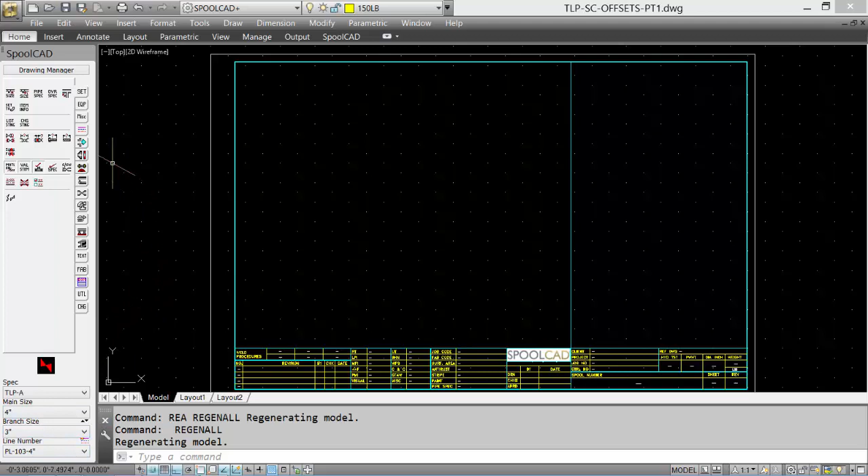First, we'll take a look at our active settings to see that we have the correct isoplane, spec, main size, branch size, and line number. Next, we'll select the auto route feature and enable auto route, which will automate our component placement.

Next, we'll go to our fittings tab and start with a piece of pipe, and we'll just graphically, for this sample, run a piece of pipe. You can zoom up on it. Let's add the elbow, a 90-degree elbow.

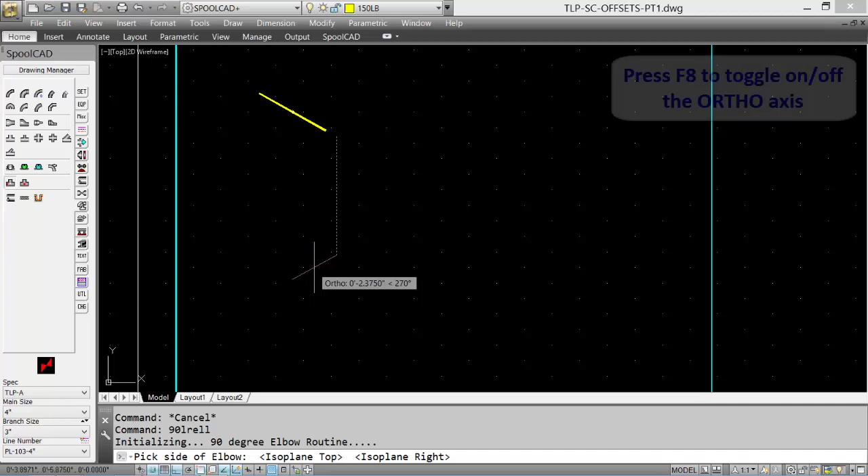By default it's going to point straight down, but we'd like to rotate this 45 degrees. So we can take it off our isoplane by hitting the F8 key, which is the ortho. It now allows us to free pick.

We can then graphically select a 45 degree, or what would appear to be a 45 degree angle. That looks pretty close, and we'll pick a point. The 90-degree elbow is now bent at the 45 degree.

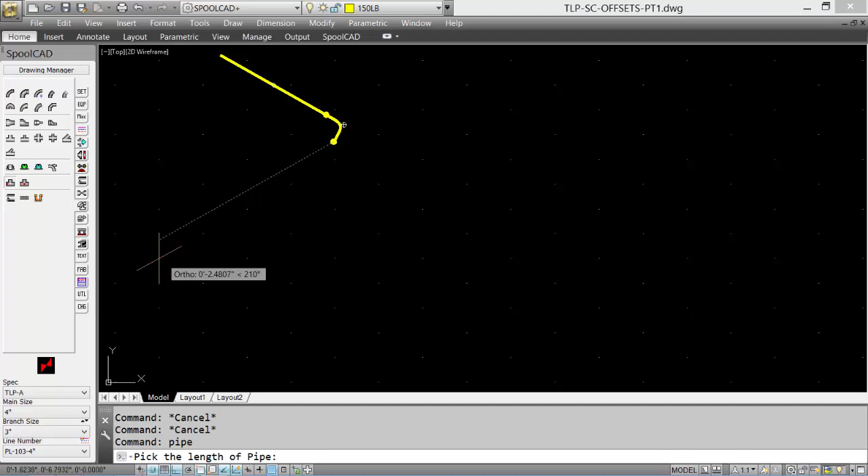We can then add in a length of pipe. This is just a vector, and we'll add the pipe to the end of the elbow. Select a reasonable distance, pick a point, and the pipe follows the angle of the 90-degree elbow.

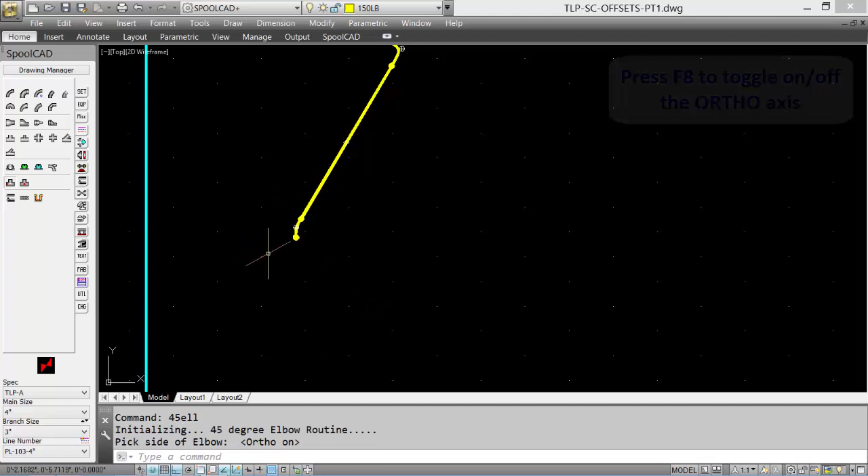We can then finish off with a 45-degree elbow to bring this back to a vertical. To force it to a vertical, again we'll turn on our F8. Select F8 to turn on the ortho, pick down, and it puts in a 45-degree elbow facing down. We'll finish off with just a length of pipe.

And there's our simple offset. The 90-degree elbow, turned 45 degrees, bending down to a 45-degree elbow.

The next topic in Module 7 is drawing rolling offsets. For this sample, we'll use two 45-degree elbows and create a rolling offset. We'll zoom up on this area of the drawing.

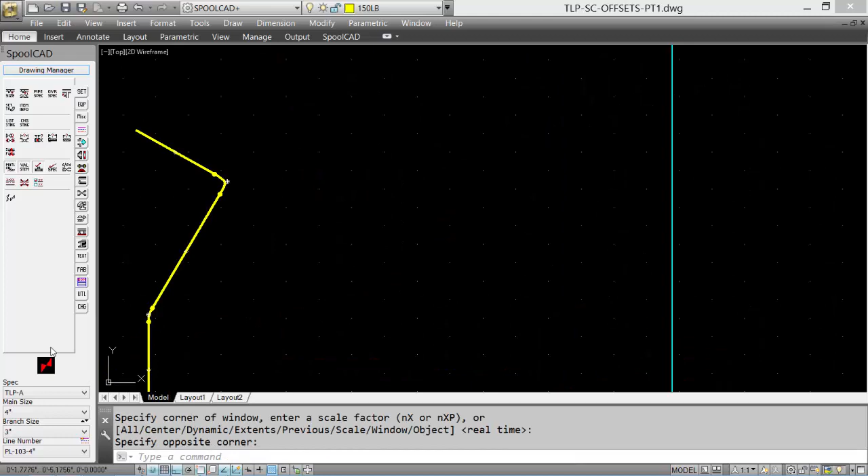First, we'll check our active settings to make sure they are set properly. Next, we'll enable the auto route feature, and then again select our fittings tab. Select a piece of pipe, place it, and then select the 45-degree elbow.

Normally the 45-degree elbow would just come down at 45 degrees in the same plane. We're going to give it the illusion of offsetting by moving it a little bit ahead.

Place another length of pipe. Again, this is just a distance vector. It will follow the 45-degree elbow.

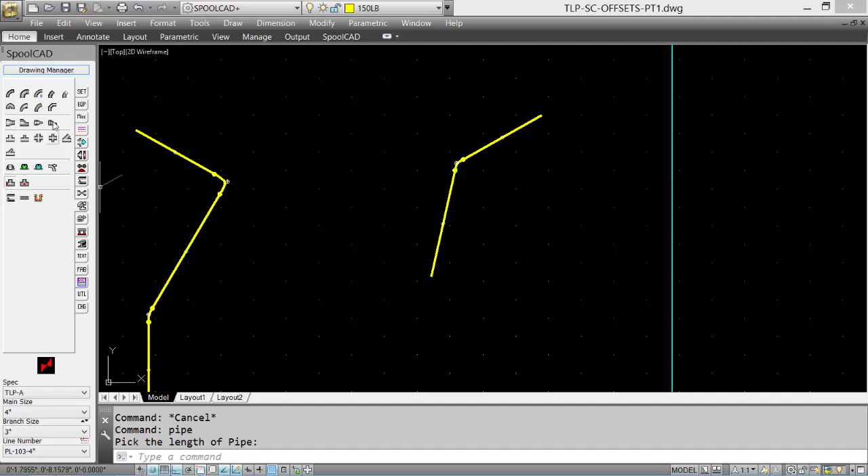Follows it down, and then we can place another 45-degree elbow to bring it back to an isometric plane, and then finish off with a length of pipe. So there's a rolling offset, giving us the illusion that it's bending over and rolling at the same time.

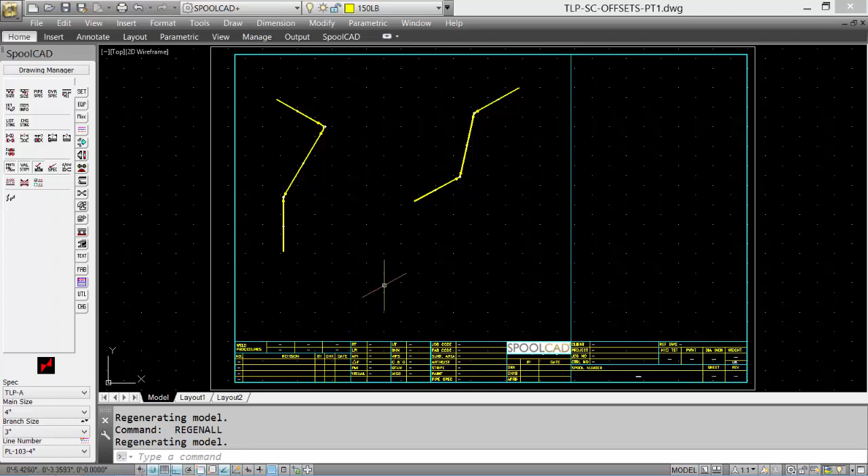Our next topic is placing piping bends. We'll place a sample bend just down in this location of the drawing. We'll zoom up on it, and place the bend in here.

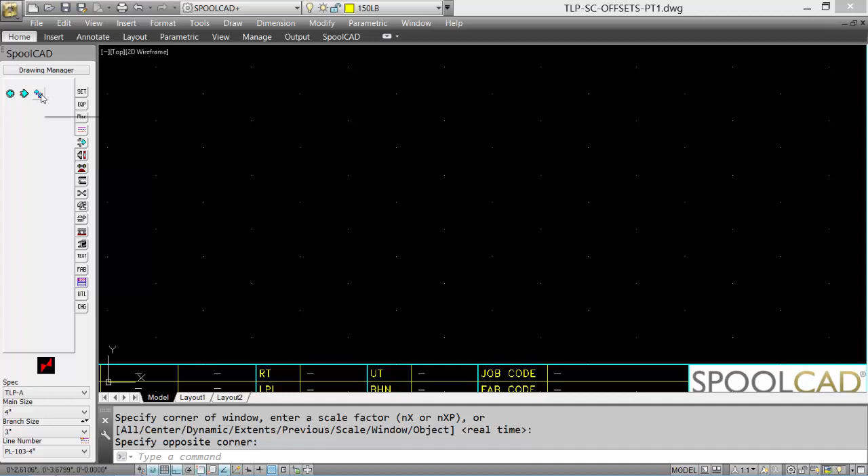Adjust our active settings, enable our auto route feature, and then select our fittings tab. We'll start with a piece of pipe. We'll then pick our pipe bend tool.

The pipe bend dialog appears, allowing us to set the pipe diameter for the bend. We'll use our 4-inch main size. Angle for the pipe bend, set to say 60 degrees.

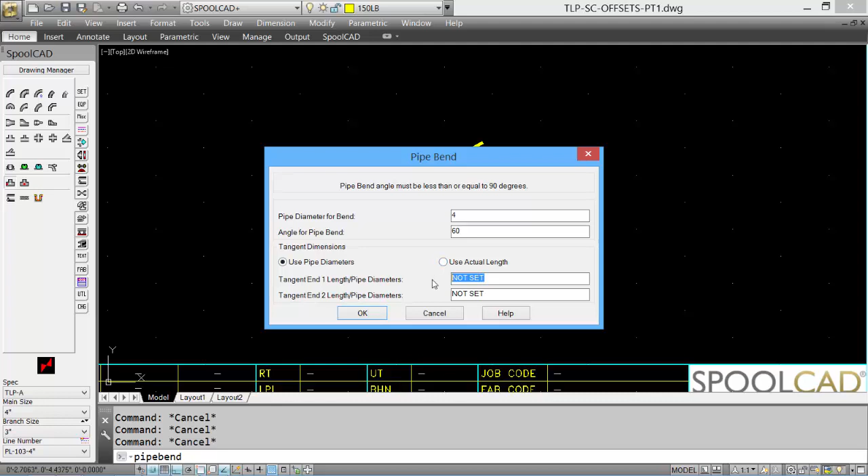You can either use pipe diameters or actual length for our tangent ends. We'll just use pipe diameters, and we'll set that to 5 and 5.

So there's 0 degrees, 30. Graphically select approximately 60 degrees. This is about there, and our pipe bend is placed.

We'll finish it off with a length of pipe. And our pipe bend is placed.

Our last topic in Module 7 is the dimension tools. Now that we've placed our offset, our rolling offset, and our pipe bend, let's look at placing the dimensions.

Select the Utilities tab. We see our normal ISO dimensioning tool. We have our offset dimensioning tool and a rolling offset dimensioning tool. Let's start by placing the offset tool.

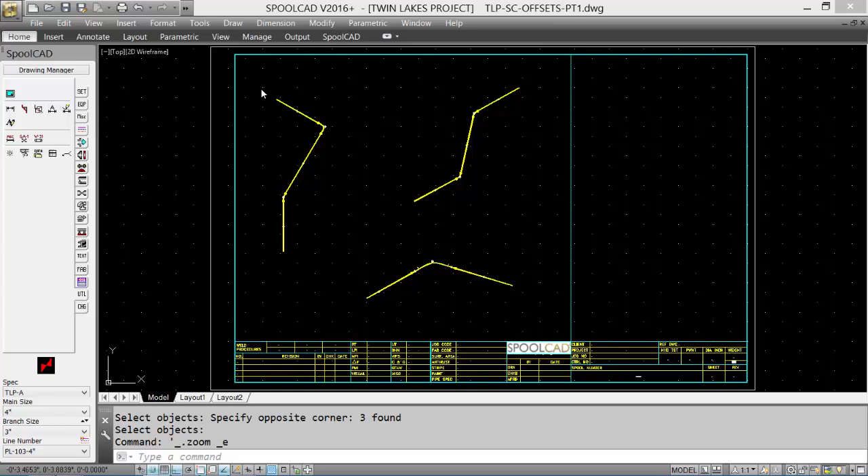Select the tool, fittings and pipe. Under the dimension mode, select the style. We know that it's a 45-degree angle, so our 1 and 2 sides we know must be equal. Put in values, click OK.

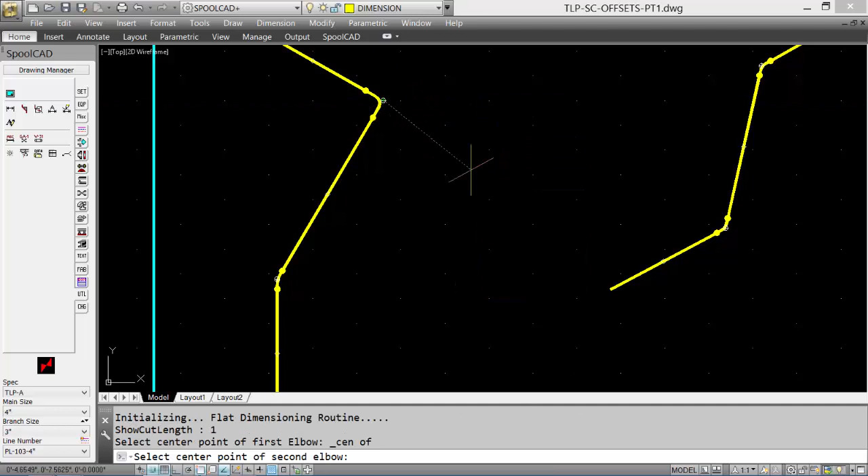We'll zoom up on our offset, and we'll pick the center point of the top elbow to the center point of the bottom elbow, and then we'll define the triangle to create.

So we're going to go straight down, straight across, and then how far away do we want that triangle shape and dimensions to appear? We'll come over here, click, and our dimensions are placed. So we get the angle, leg 1, leg 2, as well as our true length.

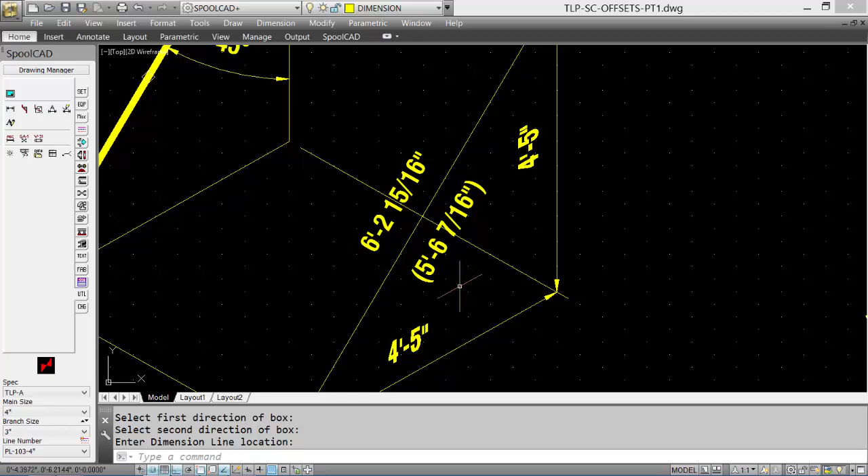Let's look at doing the rolling offset. Pick the rolling offset tool. This asks for the center point of the first elbow, so we'll repeat from the center of the top elbow to the center of the bottom elbow.

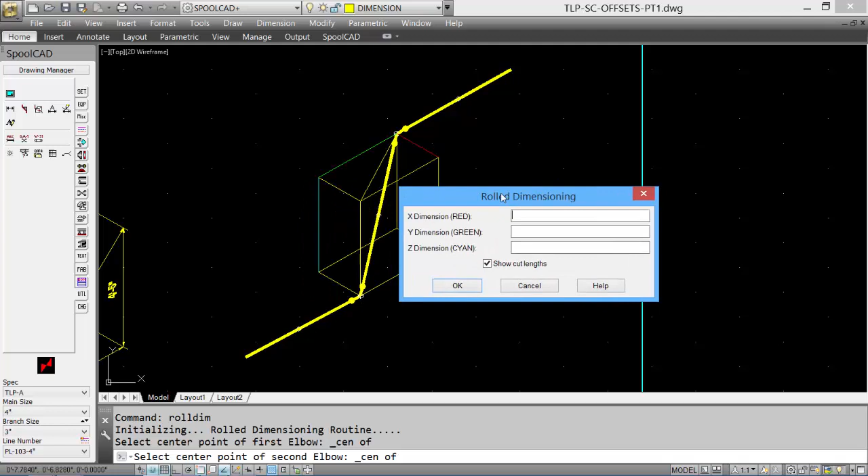A box appears showing a red, green, and a light blue or cyan colored line representing the 3 dimensions, and we'll input values for them. So these would be known values. Make sure our cut length is toggled on. We'll click OK.

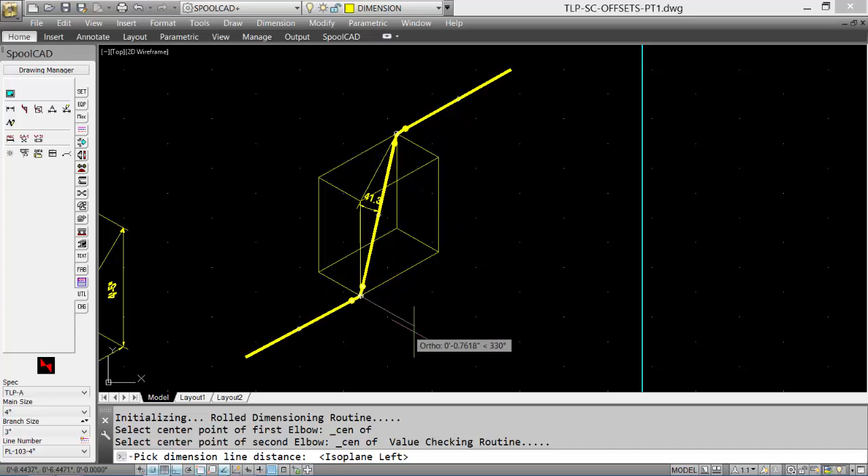And we'll pick how far we want the dimensions to appear from the box. Once again, the dimensions are placed for our 3 dimensions, as well as the true length, the cut length, and the angle.

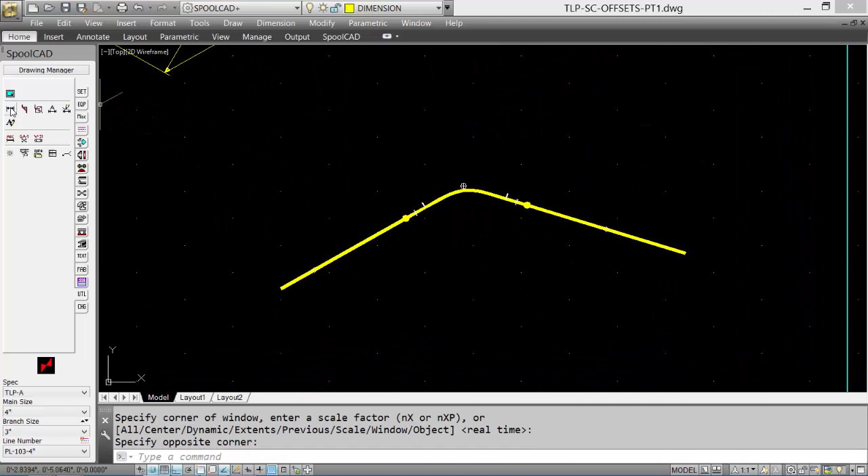The last dimension to place is our pipe bend. So we'll zoom up on the pipe bend. Select our normal iso dimension tool. Check our isoplane.

And we'll go from the end to the center of the length of pipe. We'll put in a value for the length of the pipe. Then we'll place a dimension

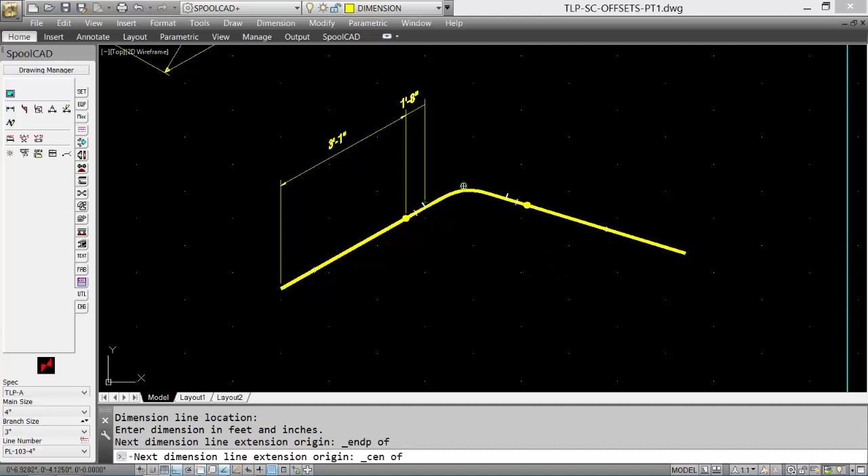for the straight tangent. It will come in automatically. And then to the center of our pipe bend, the dimensions come in automatically.

We'll finish off this leg of the dimension by using the 6th option in our dimension plane, which is the aligned dimension. We'll pick up the end of this length of pipe.

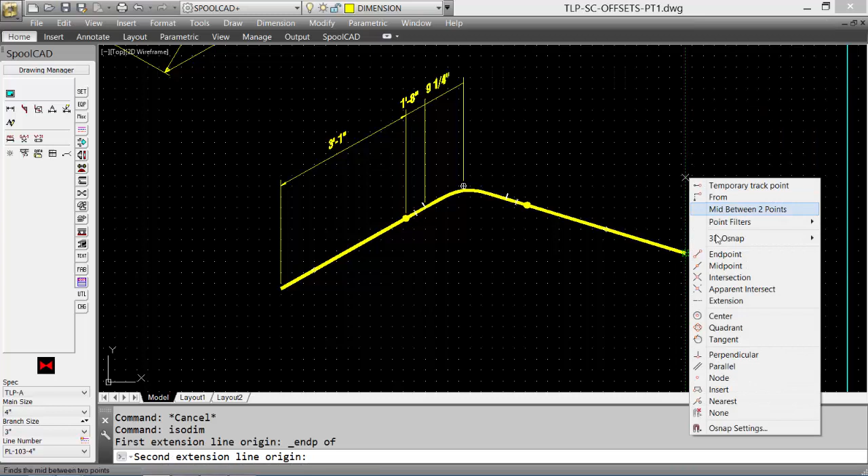This is just a dimensional vector for the distance away, to the end of our straight tangent. And again, the value comes in automatically.

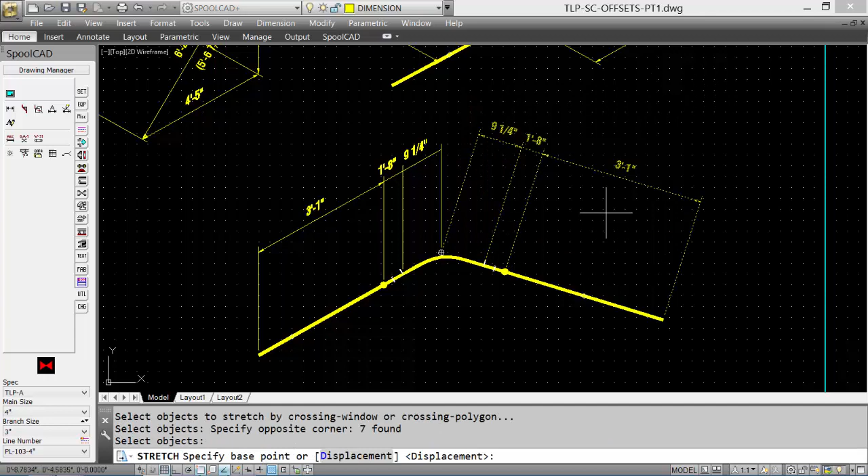And then the center. Again, the dimension is placed from our pipe bend information. We can use AutoCAD's stretch tool to graphically fix the vertical dimensions, and we're done.

Some basic tools for the dimensioning of our more complex pipe routings. Module 7 is the last module in the PROCAD SpoolCAD tutorials. Review the topics in this module or select another module.